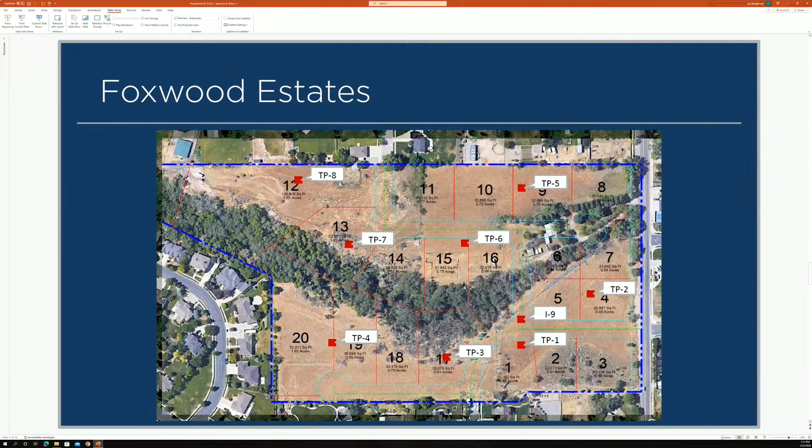First, this is our first sensitive lands project. So if we can skip ahead, as you'll see, part of our sensitive lands ordinance deals with sensitive slopes, meaning steep slopes. So we had the developer provide a lot of studies and engineering regarding slopes.

You'll see that big block of red-orange - those are the steep slopes, over 40%. As you can tell, they're in the wash. One issue we're dealing with tonight is a request from the applicant: under the sensitive lands ordinance, we adopted a slope setback. Now any lot that contains or is within 50 feet of a steep slope over 40% has to stay 50 feet back from that slope.

That's a new requirement, we've not done it for other subdivisions since we've just passed that sensitive lands ordinance. So we have homes along here and on the other side of the wash that aren't required to meet that because they were done before the ordinance. We also have a way for the applicant to request a reduction of that 50 feet if they can provide engineering and documentation to support it. They're also required to put restrictions on the plat itself showing, for each lot, where you're allowed to build and where you are not.

Andy will delve into that a bit more as he's looked into it. We've required some studies, so they've requested an adjustment of that 50-foot setback - if I recall correctly, it's a 1.5 to 1 slope. We're going to ask for cross sections for each lot so it becomes clearly defined where we will allow homes to be built to protect that slope. So that's the new thing we're dealing with regarding sensitive slopes.

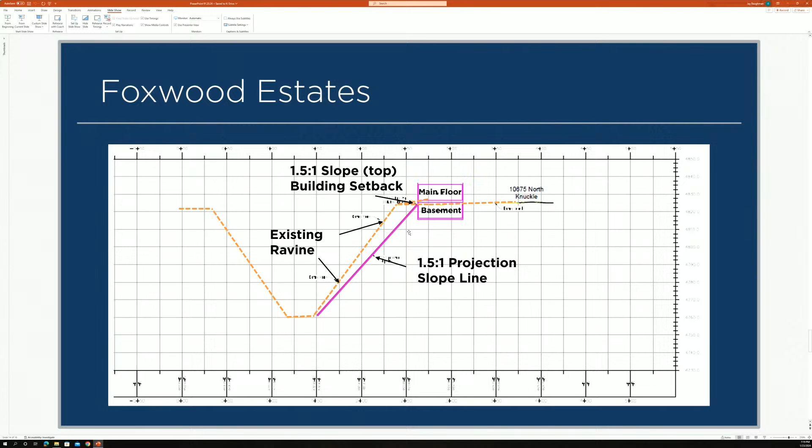So what the applicant has proposed, and we as staff have concurred with their findings, is that one of three conditions would exist. They've drawn a home here with a basement, but we're also talking about a pool in the backyard, or an accessory structure, or any type of structure that would be restricted. So this isn't just the homes, this is what might go in the backyards.

Any type of structure would follow the most restrictive of these three conditions. Either it would be 12 feet from the edge of the wash to the nearest edge of that structure, or if it's a structure with footings below grade, those footings would be at least 15 feet from the top edge of the wash. Or if a 1.5 to 1 slope pushes that farther away from the wash, say it makes it 25 feet, then it would be that 25 feet.

That slope will be determined based on each individual lot, and the city will be provided with a similar cross-section for each lot showing the exact survey and exact condition, and that restriction will be placed on the plat. We'll be very clear on the plat where the buildable area is versus where no structures would be allowed.

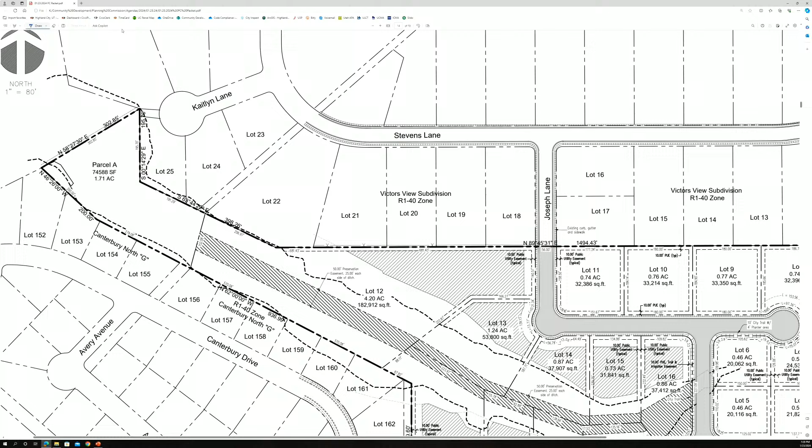So I got a couple of questions for you since you opened up questions. The geotech report - I know for a fact that that ravine has been used as a garbage dump for the past 100 years. Did they satisfy any concerns the city had with that? Did they find anything? Did they take soil samples? Did they drill test holes?

I'll answer that. You asked three questions, so I'll answer it in two or three answers.

They did do test holes. They are aware, and you are absolutely right, Commissioner Zane, that the edge of the wash, in various locations, debris over time was dumped there, and the farmers who had the land before gained a little real estate, so to speak, by placing old broken up concrete and whatever and pushing fill out there. So they are aware of it, and they're actually extremely conscious of it.

In the time leading up to this coming to the Planning Commission, they've actually been down there trimming a few trees, trying to clean up some of the dead wood. They're not trying to defoliate the wash, but they're trying to make it so they can work in and around the wash. We've had numerous discussions with them that they are going to go along the edge of the wash and investigate and clean up, to the extent possible, the junk that probably is along the edge there and subsurface.

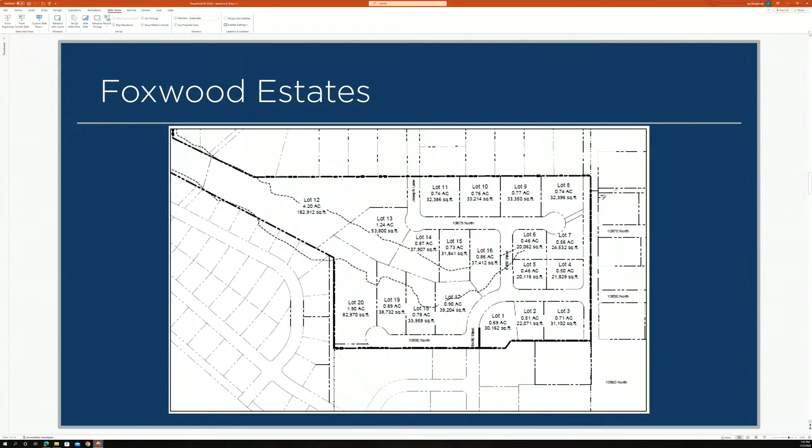Sure, and just another question. Can you go back to the slide that has the red sensitive areas? Something stood out to me. It's called parcel C on this drawing, but it's called parcel A on the other one. Is that an omission, or is that a different definition?

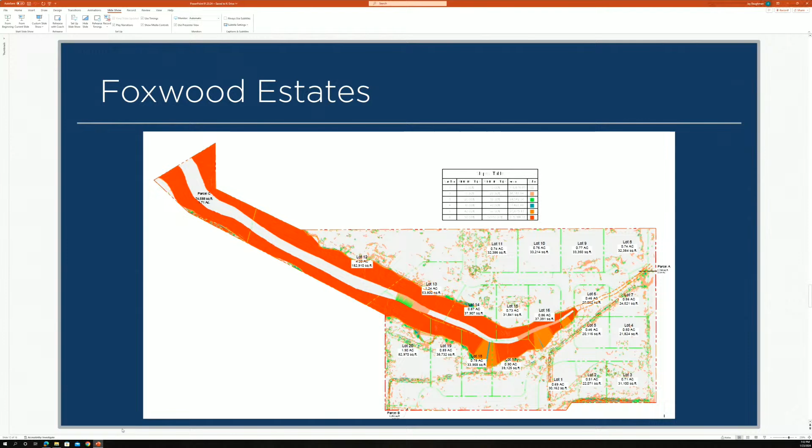I think that just might have been an early draft, a various arrangement. We'll just want to identify that and make sure it gets fixed in the future submission.

And along those lines, in the recommendations from staff, it says that that will be dedicated to the city. My understanding is you can deed it, quitclaim deed it, give it to the city. Is dedicated the right word to say the city owns it? Dedicated means you're giving them the opportunity to use it, but you're the lawyer. Yes, that would be fine. Thank you, that's all I've got for a minute.

So I did have a question about the substance of whatever trash was put in that area — is this landscaping trash, is this rocks, or is this waste?

The only thing I have personal knowledge of is when we were constructing the sewer line I referenced. As we were pretty close to the edge of the slope, we found various pieces of concrete, kind of like old broken up sidewalk and curb and gutter, et cetera. In talking with those we worked with on the Canterbury side, they indicated that as they did their landscaping, they also found some concrete and miscellaneous debris.

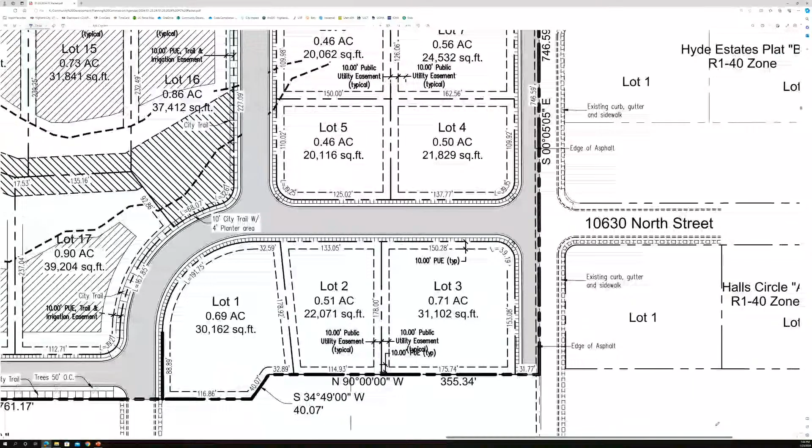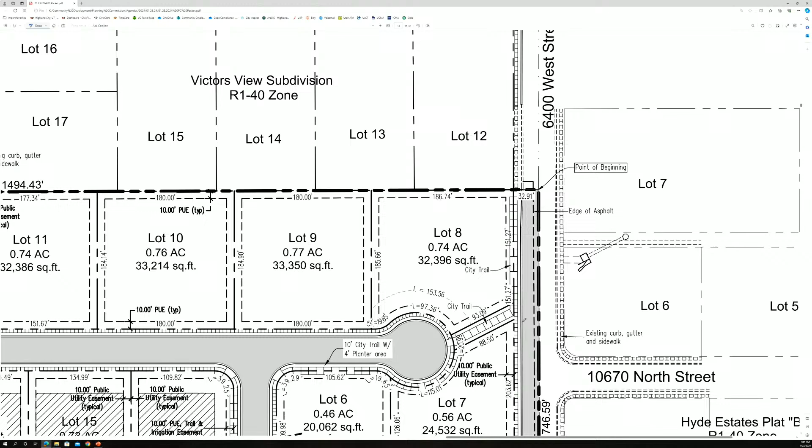There's fencing along this south side and between the lots, which is one of the stipulations staff has recommended. To clarify where the trail goes: walking from south to north, you'll have park strip and regular sidewalk, then at the end of lot 7 it transitions to no park strip with a wide asphalt path. The trail only replaces the 5-foot sidewalk, so the right-of-way actually increases, going from a 5-foot sidewalk to a 10-foot trail.

But that park strip continues, so you still have the nice visual from the street. The park strip stays, and the sidewalk will just be turned into asphalt and be significantly wider. You'll see it curve down in between the lots into the neighborhood there.

Thanks for explaining, sorry, one more question. If you can zoom back out on this, I didn't quite understand what you were saying to Chris. Looking at that, you have the heavy dashed line right on the cusp, is that the cusp of the hill, or is that designating the building envelope?

This is the edge of the hill there. The hashed area with diagonals going up to the right is the buildable area, and you can see where it gets closer here. That's what they were talking about, pushing up to the minimum 12-foot distance where it's closest, representing where that 12-foot line would be.

If you go down to lot 12, there's a lot bigger gap between that heavy dashed line and the building envelope. That's where we're saying if we permit that change, that's how much further that building envelope can go. Okay, that's what I wanted to make sure.

What you're seeing there is the farther west the wash goes into the property, the deeper the wash gets, and consequently that slope starts to become the governing factor rather than the minimum setback. So like you noted on lot 12, the buildable area is pushed quite far from the wash because of the depth of the wash.

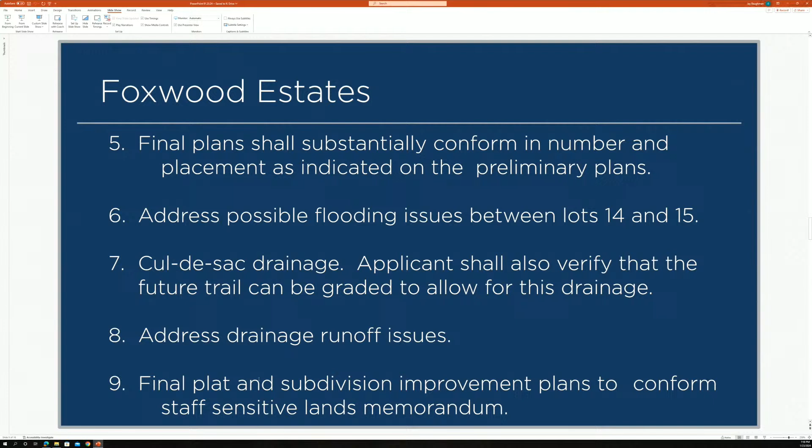Of course. So it's for any cul-de-sac, but I think the main one we were concerned about was this one down here. I could be wrong, but I think that's the one. So either we get that drainage to work the way we want to, or we'll ask them to provide an appropriate drainage corridor, likely going into the wash between the two lots.

19 and 20. I will note that it's likely that the actual trail can be that overflow corridor. They just need to kind of measure that as it goes clear out to the adjacent street, where it would ultimately go into the streets in Canterbury.

But if that can't work, then in this case, you'll recall the standard that we adopted is it either had to have a drainage corridor that went to a street, or to a drainage corridor that could handle the water. The wash could certainly handle the water, and so as an alternative, if the trail can't function as the drainage channel, then we would work with them to define a drainage overflow path to the wash, kind of between lots 19 and 20, or something similar that they could live with and feel good about.

Our point is if the drainage in the street doesn't work, we want to have somewhere safe to go. Ultimately, if you pare it down, this is one of those cul-de-sacs they're not proposing to lift. Those folks that live behind that cul-de-sac don't want it lifted either, because they don't want it higher than the natural grade; they just want these homes to sit like their home does. So providing that alternative standard, as we talked about last meeting, is a good thing, and you're seeing some of those good things come to fruition here.

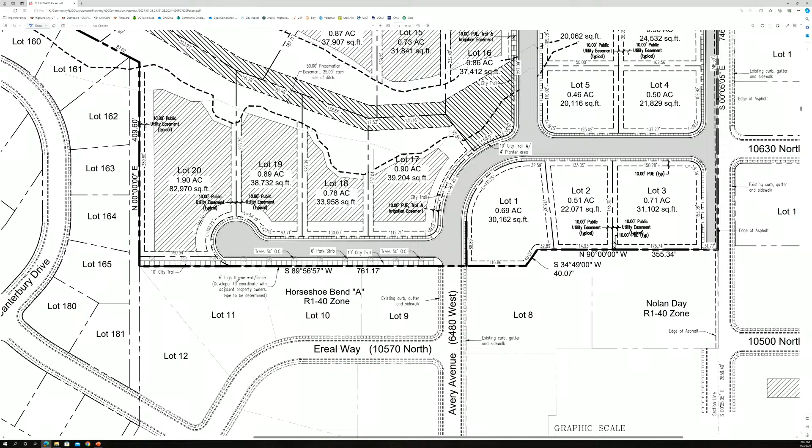So I'm going to pull that up specifically. Per our new code, when there is a request to change that slope setback, staff is supposed to prepare a memorandum to explain whether we think it's good or not. And as you see here, we explain that we think it's reasonable and supportable, but we do have a long list of stipulations on top of that.

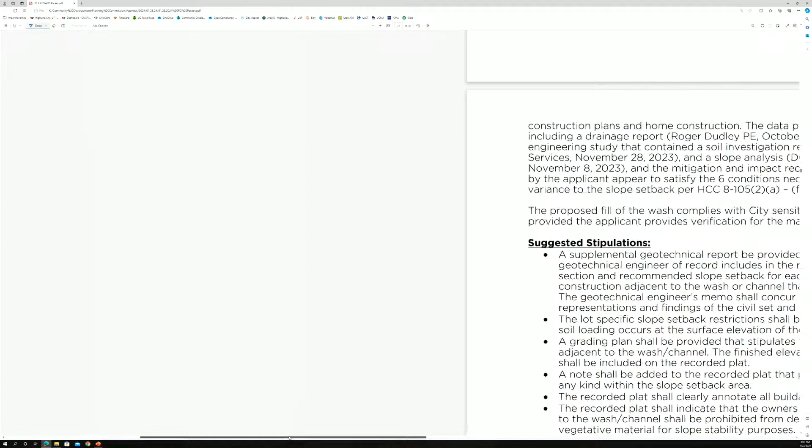Would you be kind enough to just expand it so that it's visible to everybody, please? Absolutely. Is that good? So just to lay this out, this memorandum was included with the staff report in the agenda packet.

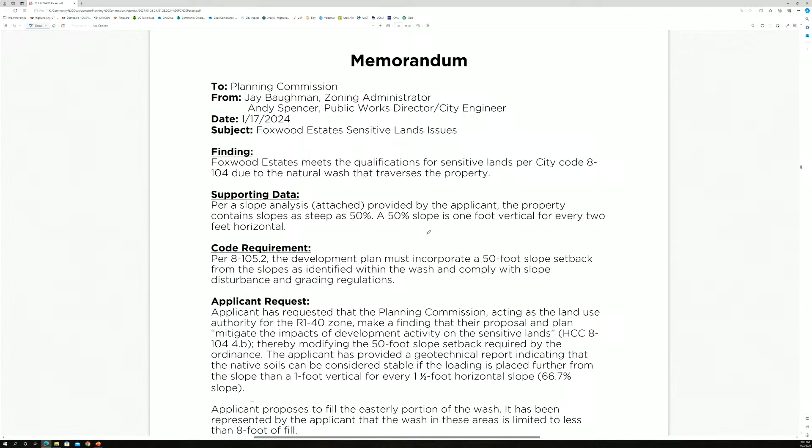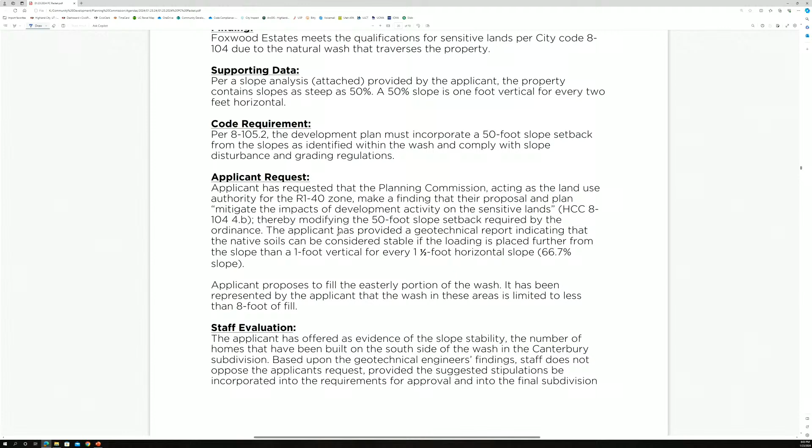The memorandum explains that this subdivision basically qualifies — fortunately for the development, they'd want to qualify for it — but they meet the criteria to be subject to the sensitive lands ordinance. We required them to provide a slope analysis and other studies. They requested that you adjust that 50-foot slope setback, and that explains the maximum slope, the 1 to 1.5 or 1.5 to 1 slope requirement.

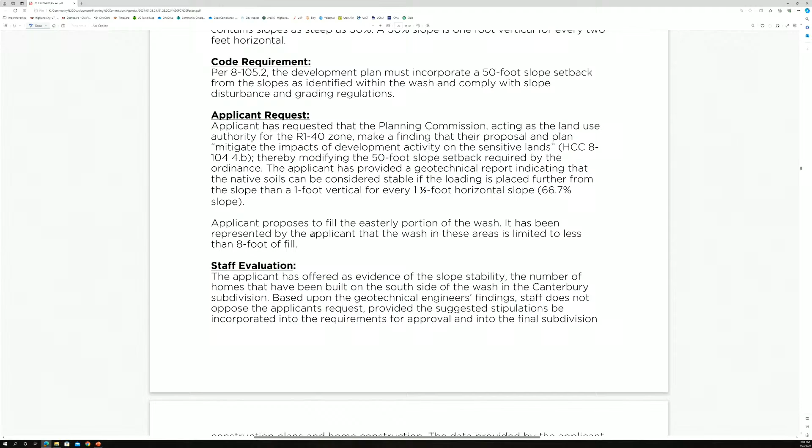This addresses that road that crosses the wash on the eastern boundary — how that was evaluated, and we were comfortable with what they were proposing. Our recommendation is that we don't oppose their request as long as you adopt our stipulations. We believe those can be adopted and incorporated into the final subdivision construction plans and as part of home construction.

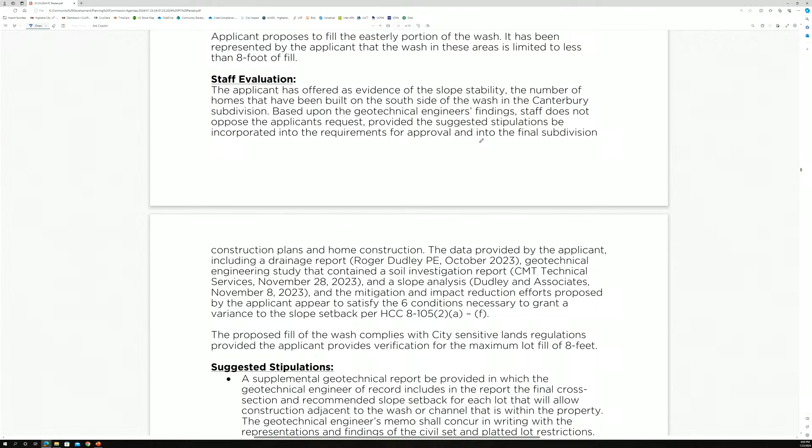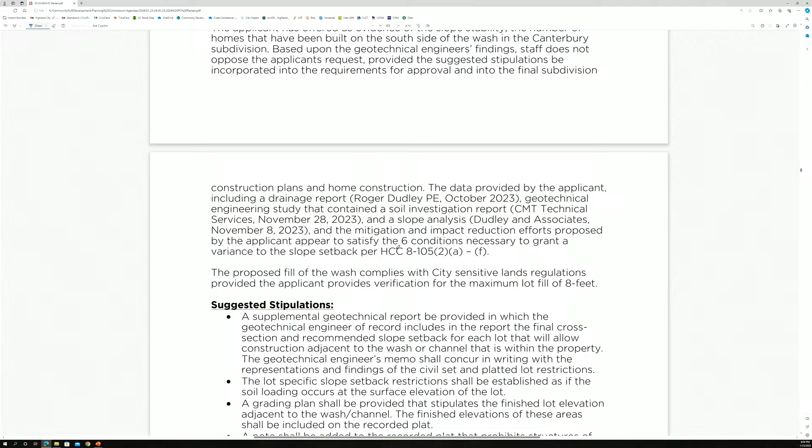We outlined the plans so that in the future we can pull up these exact reports and reference them clearly, and we found that would satisfy the sensitive lands ordinance. So we have a long list of suggested stipulations here, and most of these we've covered, but I'll go over them again.

The first is that a supplemental geotechnical report be provided. This is the updated one as we move to final, so we get specifics for each lot as to what the requirements would be. The second stipulation, similar, is that the lot-specific slope setback restrictions shall be established as if the soil loading occurs at the surface elevation of the lot.

I'm going to need some engineering on that one, but that's beyond me. That just means they're going to look at that 1.5 to 1 line as if it goes all the way to the surface.

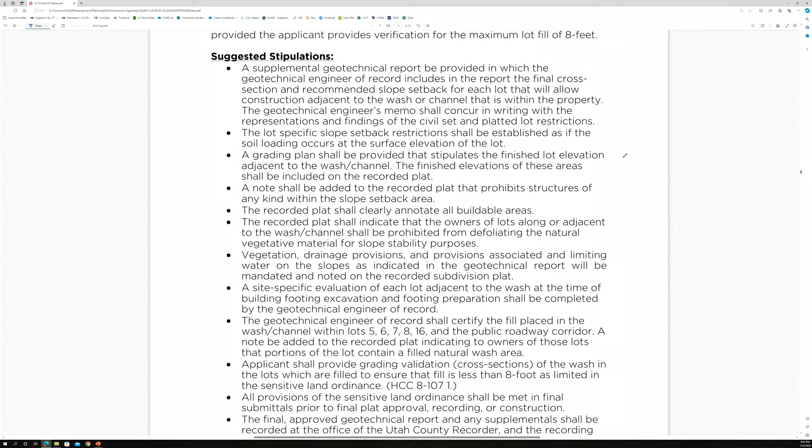We'll ask for a grading plan to establish the final lot elevation for all of those lots adjacent to the wash. That's part of the overall delineation of where you can and can't build. We want a final elevation showing this is where you're at.

Same with the next stipulation we added: a specific note that says here is where it's buildable and here is where it's not. The next several relate to that. The recorded plat shall annotate all buildable areas, that's the cross-hatching that we showed you.

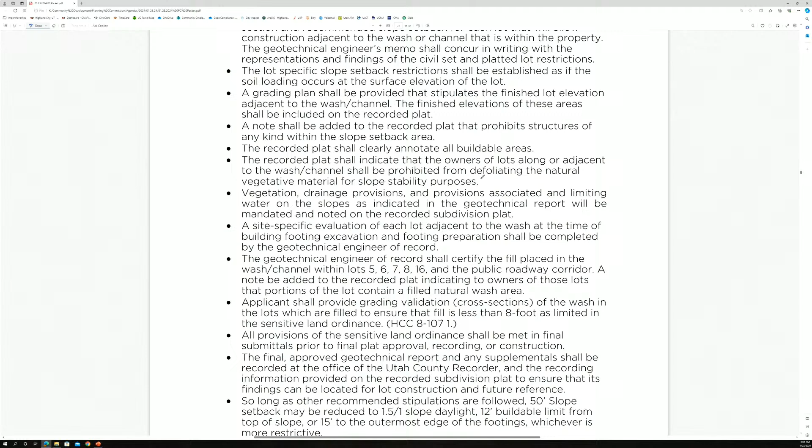The recorded plat shall indicate that owners will be prohibited from defoliating the natural vegetative material for slope stability purposes. That's part of the sensitive lands ordinance where we say you can't disturb the vegetation, which helps prevent erosion.

We do want to clarify that doesn't mean they can't cut down a dead tree or anything. We're expecting that lot owners will care for the wash, but what we're getting at is you can't come in and just clear cut that wash, because then we've got a potentially erodible surface, and some of the conditions we looked at to say it's safe to build a little closer to that wash change when you strip the vegetation on that surface.

But we expect that over time the owners will care for that, and as the trees die or other things happen, they could prune up the trees to make them look prettier or whatever. We're just talking about not stripping the soil bare.

The next recommended stipulation is essentially that they will comply with the geotechnical report in terms of vegetation, drainage, and limiting water on slopes, and that the final plat will incorporate that geotech report.

Similar, the next one is that a site-specific evaluation of each lot will be performed by a geotechnical engineer in connection with actual building. So when it comes to building permits, we're going to require and make sure they're properly studied, that you're not going to have a house slide off a mountain.

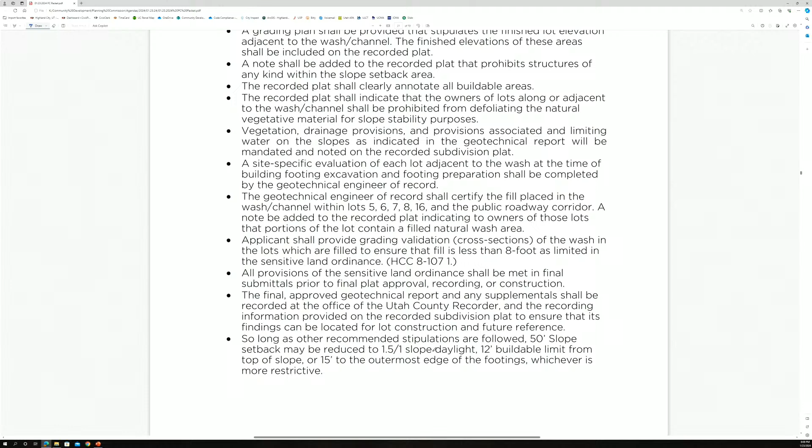Would this be accomplished before it goes to the board? The group that's after, if this is approved or unapproved, the next body that meets, made up of planning commissioners and whoever, will all this already be in place? Yes. So the next step is this entitles them to develop, but they're going to have to come back and provide us the final information, the final reports, the final studies.

Some of it will be done at building permit stage for each lot, but other than that, we'll require all that information to be provided so the board will review and approve it. We're going to look back and say, assuming you approve with these stipulations, has the planning commission adopted this stipulation, have you carried that forward and updated your report, adding those notes on the plat as recommended? Great, now you've satisfied that moving forward to final plat. So yes, this will all be carried forward.

So now I'll go back to the stipulations. We're almost through them, let me go forward to the last slide here. Parcel A shall be dedicated to Highland City, that's the northwestern little parcel. The irrigation ditch running through the property will be properly buried and managed per Lehi Irrigation Company standards and the city standards as well.

We also have landscaping requirements regarding the types of trees, making sure it matches our tree standards and variety, installing trees, rock mulch, sprinkler systems, and xeriscaping type materials will all be provided for those trail areas in accordance with our city ordinances. And then a theme wall along 6400 West.

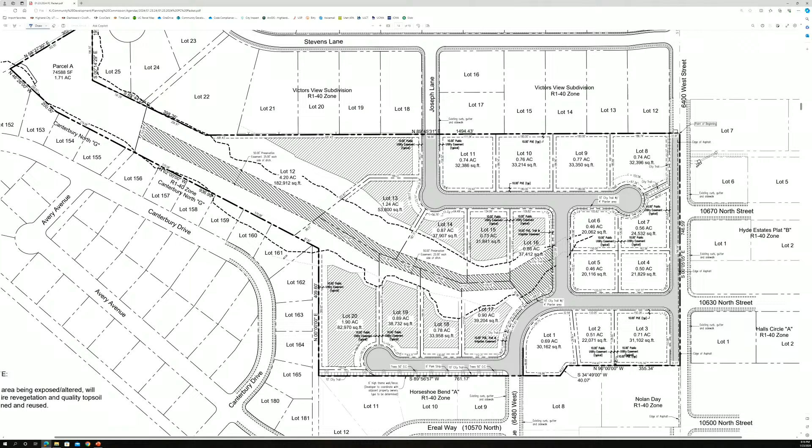So I've got a couple of questions for you. I think you already said it, but I wasn't sure—is the intent of Millhaven to build out all these lots? Correct. You're not intending to sell any of them off?

We've had a few builders approach us to get 1 or 2 of these lots. We're toying with the idea of maybe 1 or 2 going to a high-end custom builder. I'm not going to name any names, but it would be someone we'd feel wanting to do maybe a parade of homes or something in here. We feel this is going to be a very nice subdivision. If you've been up to our Tree Farm subdivision, that's where our parade of homes was this year, and we feel this will have a lot of the same feel. We anticipate having 1 or 2 parade of homes in this area in the future.

Okay, and the reason for my question was simply, this is the longest list of restrictions I've ever seen on building a house. Well, to answer that, it's because we're going through these 2 processes as the guinea pig, and that's really what's happening.

Understand that. My concern being, if you handed that off to a private person doing it, or an inexperienced contractor, or whatever you want to call them, that would be a problem. It makes me a little more at ease that you're going to see it through to the end and your relationship with the city will maintain. If we sell 1 or 2 off, it would be to a large custom home builder, and we would still be involved. We're going to build the entire subdivision out and be involved until the very last home.